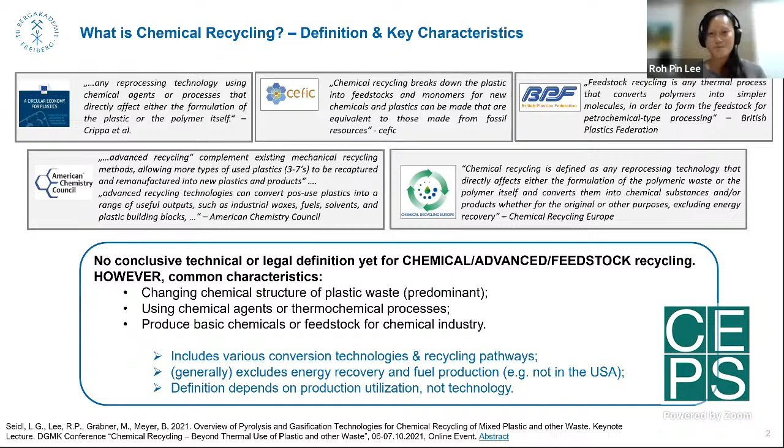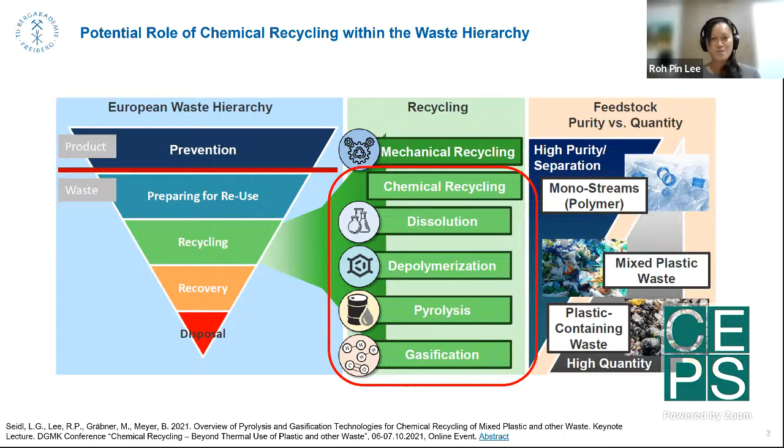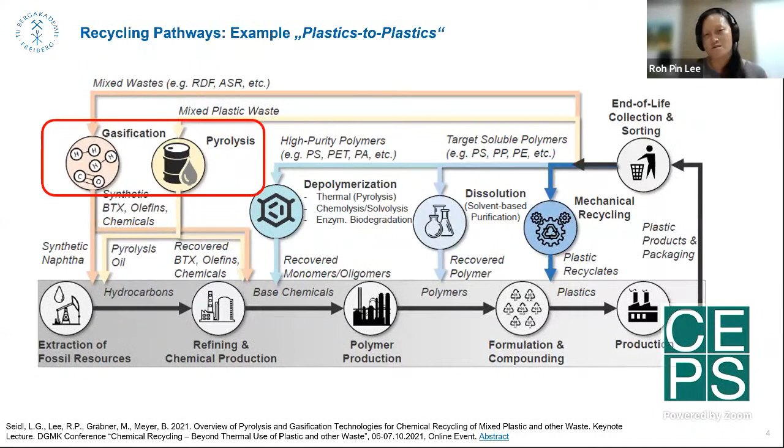So this is just an example based on plastic to plastic. What happens in the linear economy is following extraction, we go through refining and chemical production, producing the polymers, and then going on finally to the plastics. What happens after utilization is it could go through a whole range of different recycling routes where they are recirculated back into the chemical production chain at different areas. Today, for the rest of the slides, I really want to focus on pyrolysis and gasification for the rest of our discussion.

What are the technological advantages and challenges when we talk about pyrolysis and gasification? For one, looking at pyrolysis, what we have noticed based on market development is that it's suitable for a range of plastic waste. What is really charming about pyrolysis is the possibility for the products to be integrated into existing petrochemical sites, for example as a naphtha substitute for production. Also the scale of production is not that big - very often modular kind of production - and this allows it to be very attractive for decentralized production.

And the pyrolysis oil, which is produced in smaller quantity, can be channeled altogether to a centralized position or location, such as at a chemical production site for centralized utilization. So that's the charm of pyrolysis.

But on the downside, based on our screening of pyrolysis technology providers on the market, a lot of the technologies are suitable mainly only for mixed polyolefins, meaning PP and PE. And very often the oil quality is challenging. Pyrolysis oil contains a wide range of different components, and it is quite challenging to get this to match the specification of a cracker, a naphtha cracker for example, which is like this very sensitive machine.

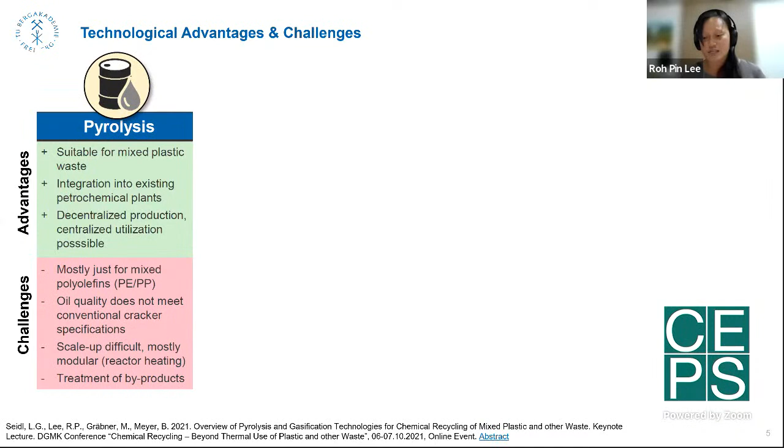So very often, in order to make sure that the oil quality could fit specifications of a cracker, you have to make sure that the waste going in is relatively pure. So that's one restriction for pyrolysis for a lot of the technologies out in the market. Scaling up tends to be also very challenging, and treatment of byproducts is also an issue which is not very often addressed openly. Some examples of pyrolysis projects out in the world today.

Agilyx have a plant in the USA focusing on polystyrene waste to monomers, and they're operating at 10 tons per day. Plastic Energy have 2 plants in Spain, for example, operating at 15 tons per day.

We have the CTC technology from Carboliq in Germany, and they are kind of unique because they are looking at municipal solid waste, so a mixed range of feedstock which is not just plastic, operating at 12 tons per day to pyrolysis oil. And what's interesting is Brightmark Energy in USA, which has currently a plant undergoing construction and going into commissioning. That's on the larger scale, going at 300 tons per day.

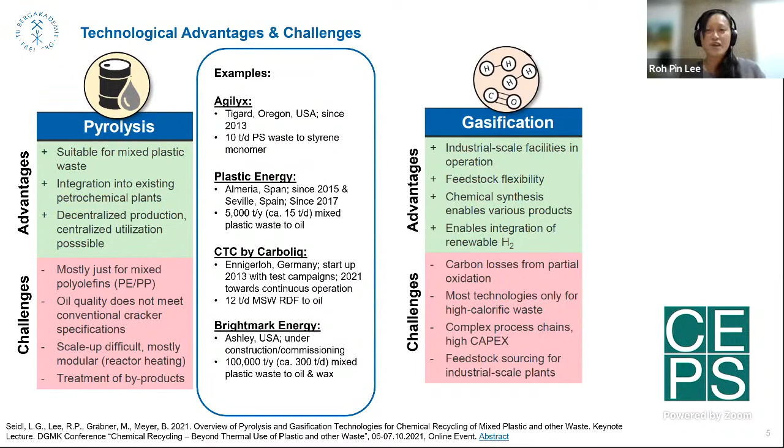So as a contrast, let's look at gasification. Compared to pyrolysis, gasification is on a much larger scale, and it also has a wider feedstock flexibility because it operates at a much higher temperature and generally at pressure, which allows it to break down the feedstocks into synthesis gas components, into molecules.

And the advantage of gasification is that the synthesis gas, which is a mixture of CO and H2, can be channeled on for chemical synthesis, a wide range of synthesis possibilities. We are talking methanol synthesis, ammonia synthesis, etc. And through all these routes, you can come up to a wide range of products.

And this whole process enables the integration of renewable hydrogen. So ultimately, in the future, where we have so much renewable electricity on the market that we do not know what to do with it, we can integrate it into the gasification process to go for really CO2 neutral chemical production. So that's the charm. But challenges are definitely there.

For one thing, operating at such high temperature and generally high pressure conditions, you're going to face carbon losses along the processes. And the technologies being deployed on the market right now very often target higher calorific waste of about, let's say, 20 megajoules and above. So if we look at municipal solid waste, which is generally about 12 to 14 megajoules, this is the question: what needs to be done to prepare the feedstock to make sure it can accept this kind of lower calorific waste?

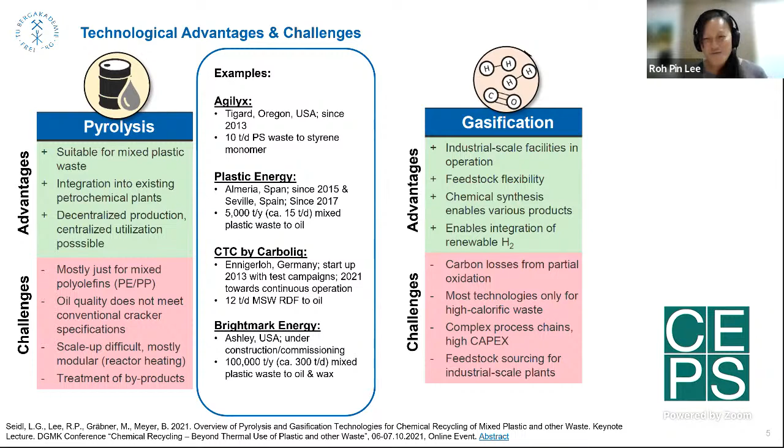Gasification has a complex process chain, and on the larger scale it is more complex than pyrolysis, which translates into a higher capital investment cost. And the question is, if you have a larger scale plant, where is all the feedstock supposed to come from? Even the pyrolysis providers on the market are noticing now that feedstock is really the bottleneck right now. Some examples of pyrolysis and gasification projects out in the world right now.

Next example is Enerkem, also very interesting. It has a biofuel plant in Canada, in Edmonton, in operation since 2014 for methanol production, and in recent years they have switched to ethanol because it makes more of a business case. Enerkem has announced a couple of projects in the Netherlands, Spain, Canada, China, etc.

Thermochem Recovery - I'm sure a lot of you have heard about this big project they are pushing, the Sierra biofuel plant in USA. Construction is supposed to be completed this year already, so they must be going into commissioning, and they are targeting municipal solid waste for FT Syncrude, so Fischer-Tropsch products.

And last but not least, we have InEnTec. Another interesting technology is plasma gasification combined with fixed bed. According to them, they are looking at a smaller scale because this actually came more from the hazardous waste gasification side.

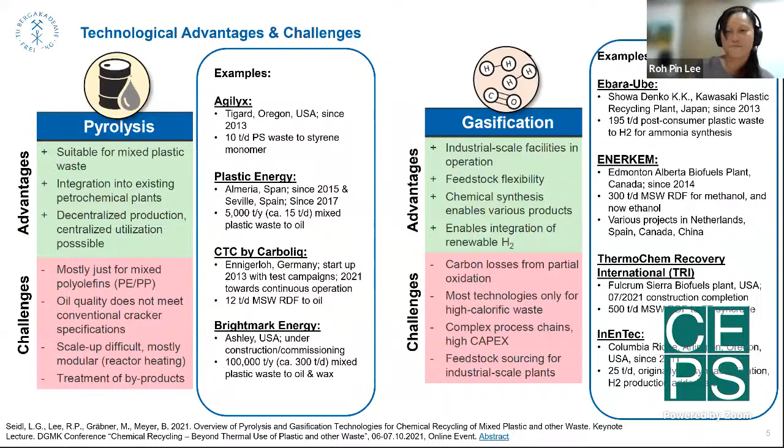So the global state of play for pyrolysis and gasification today. If we look at pyrolysis, generally what we are observing is that the technologies have lower feedstock flexibility, but there's a large number of technology providers on the market, more than 46 and still counting. The average reactor size is about 12 tons, and scale-up targets have been announced, looking at probably around 54 tons per day. The focus for commercial deployment that we are observing right now is about 20 to 100,000 tons per year capacity.

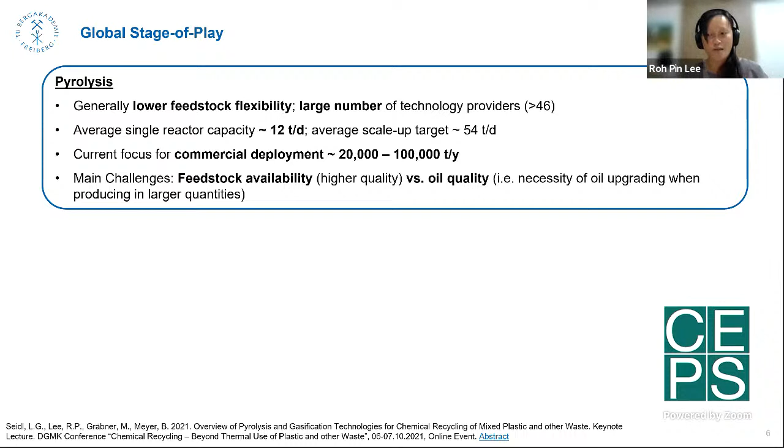There are challenges that, as I already mentioned in the previous slide, really relate to quality of the feedstock versus oil quality. So attention is moving now also more towards upgrading of pyrolysis oil so that larger quantities can eventually be fed into the naphtha feedstock.

Gasification, in contrast to pyrolysis, offers greater feedstock flexibility, but there are fewer technologies on the market compared to pyrolysis. Average reactor size is 5 times more than the pyrolysis reactor, and of course the scale-up is looking at a much larger scale. There are also a couple of projects in planning or undergoing commissioning, and a lot of work ongoing in gasification targeting increased feedstock flexibility and also to increase efficiency and scale.

If you look at gasification, it is not something new. Gasification has been around for a long time for coal gasification. That development actually arose from Germany in the 1930s and 40s already. And on the other hand, for hazardous waste gasification. Coal gasification focused on homogeneous feedstock. So the challenge is, how do I shift this industrial technology focusing on homogeneous feedstock to something very heterogeneous?

That's that challenge. In terms of hazardous waste gasification, it's on a smaller scale. Then the question is, how do I upscale that? Feedstock availability is a challenge for gasification technology because we are looking at plants which are 100, 300 to 500,000 tons per year. So you need a very stable, secure, available feedstock supply to ensure that the gasification plant is operating stably. The question is also business case. With such a high capex, how can gasification meet a business case against pyrolysis, for example, and also against waste incineration?

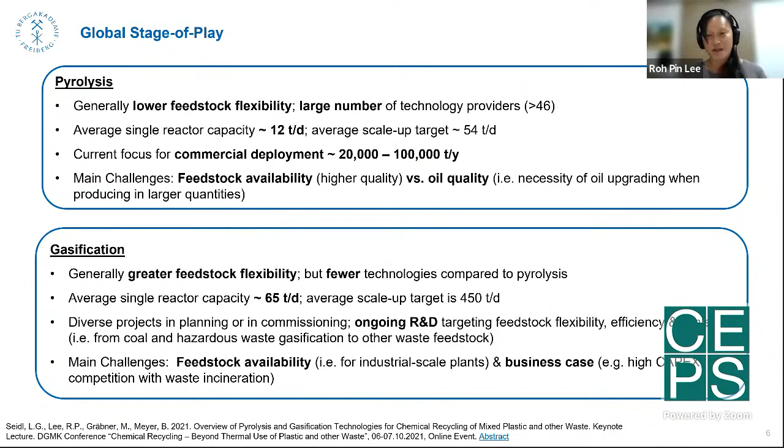So coming finally to my last slide on some of the trends and developments which we are observing. Chemical recycling's role is to complement, not to compete with, mechanical recycling. The focus we are seeing is that the market, and also policymakers, are moving away from pure plastic streams to mixed and challenging wastes. That includes also carbon fiber, glass fiber materials, composites, sewage sludge, automotive shredders, etc.

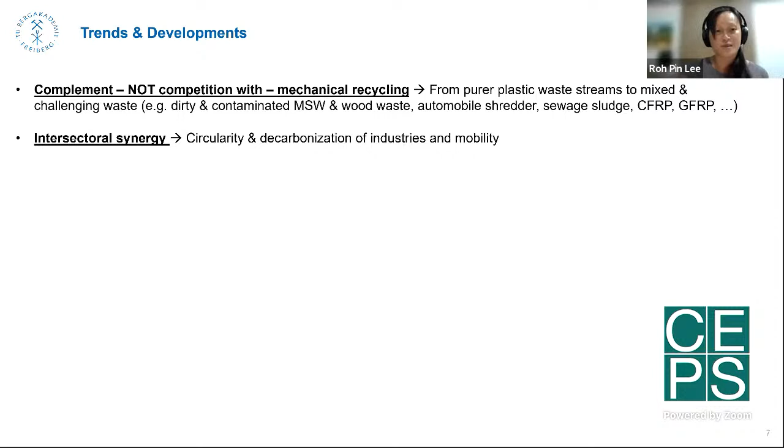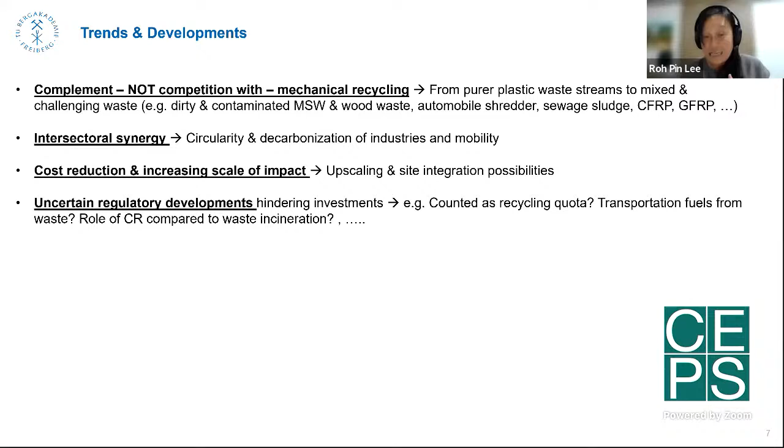There's also a lot of interest nowadays in how there could be intersectoral synergy, not only focusing on circularity, which has been what chemical recycling has generally been about, but also how it could eventually contribute to decarbonizing industry and mobility. Cost reduction, increasing the scale of impact through upscaling and site integration possibilities is of course a huge market interest. But there are very uncertain regulatory developments going on, which are hindering investments in this direction. It is unclear what is counted as recycling quota, whether transportation fuel from waste is counted as recycling, and where the role of chemical recycling is compared to waste incineration.

Just to share some examples of how regulations could have a supporting impact: US carbon capture credits have really incentivized activities in this direction. Netherlands, with the introduction of a new carbon tax for industry, including waste incineration, has really also been a huge driver for new projects in this direction. And government subsidies, having a guaranteed gate fee for the waste for chemical recycling and a price premium for CR products, has really supported the continual production of the Japan plant.

And lastly, we are hearing a lot of discussion about CR technologies, but it seems that there is a lack of transparent information, or even any information, on the technologies to allow policymakers and decision makers to really evaluate what its role could be in the waste hierarchy. So we are aware that the EU JRC is looking at an LCA study for CR technologies. Our institute is also currently working on a project funded by the European Climate Foundation to develop recommendations for guidelines for LCA and TEA, techno-economic evaluation, specifically for CR technologies.

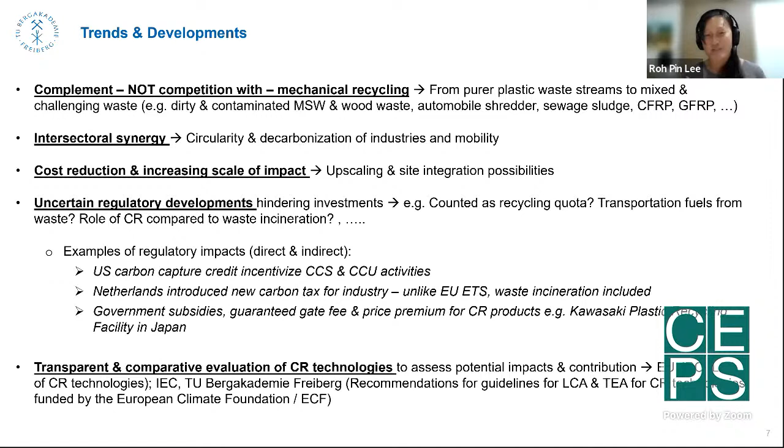So all these developments are happening right now in this very dynamic and very exciting field. I'm looking forward to hearing from the other speakers today and also to the discussion with you guys later on. Thank you.

Thank you, Roh Pin. It was a bit ahead of time, but it was so interesting. Sorry, I didn't want to interrupt. I think you set the scene very well.

Now there are a number of questions in the chat box, some of them of technical nature. Maybe you can see which ones you can answer while the other speakers are presenting. I have a lot of questions myself, so I'll keep most of them for the discussion later.

Just a quick follow-up question. I found your second slide very interesting, presenting this landscape of different definitions and interpretations. For me, this immediately brings a link with the circular economy concept in general, which is often used as an umbrella concept to describe a lot of different things. Now for some people that brings a variety of other issues - different interpretations at the member state level, at the policy level, at the company level. Or confusion, if I can put it in simpler terms.

So I was wondering whether you see a similar risk for chemical recycling, and what do you think is the way forward. Should we continue keeping this umbrella kind of terminology for all of these different processes, or do you think there could be a different way forward that could provide a different level of clarity? Whatever thoughts you might have on this.

Yeah, I think the definition - from what I'm aware, also from the discussion with Yannick - on the definition of recycling, generally looking from the policymaker perspective, they want to try to have a definition which is more encompassing, also to allow for developments in that particular area.

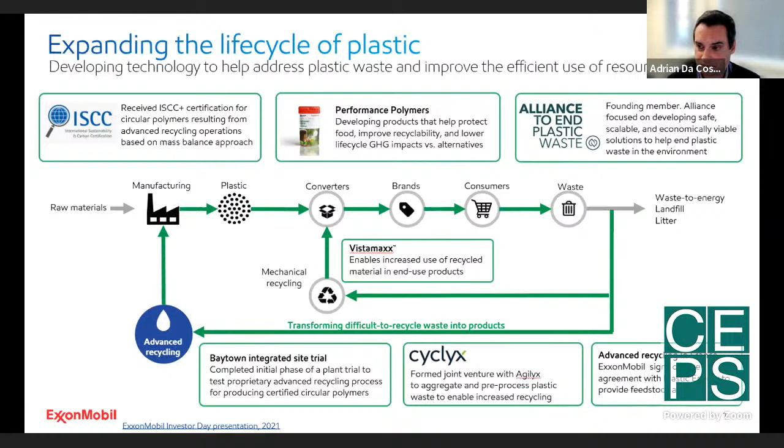Okay, good. So maybe we can move to the next speaker, and then we'll go back to some of these points. We'll move to Mattia Komoto from Aquafil. Mattia, thank you for your time today. I understand Aquafil is implementing a different type of technology featuring this chemical recycling discussion. What are your views regarding the prospects of these technologies, and any challenges and opportunities you want to highlight?

Thank you very much for the introduction. I'll try to share my screen—can you see it? Okay. First of all, I'm here today on behalf of Giulio Bonazzi, Aquafil's CEO, who unfortunately had an unexpected issue and cannot join us, so I'm going to replace him. Going to the topic of this event, unlike what was presented so far, Aquafil has taken a different approach to circular economy and to chemical recycling technology.

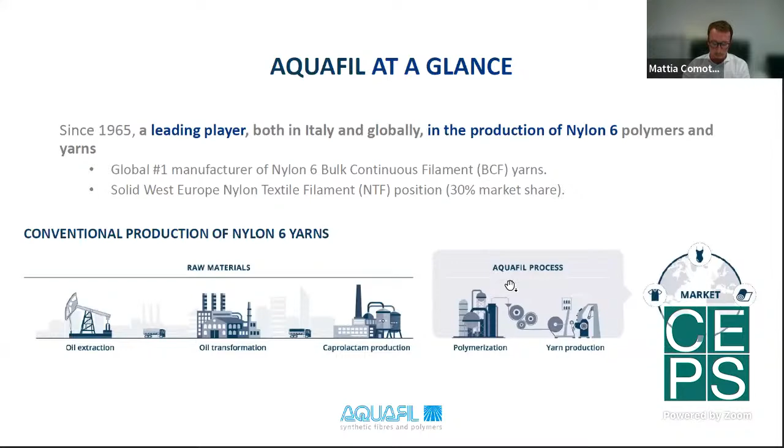First of all, Aquafil is a multinational company that operates mainly, but not only, in the nylon 6 business. Though the company was founded as a conventional nylon 6 producer using fossil-based raw materials, approximately 15 years ago we started investing in renovating our business model with the ambition of decoupling our production processes from fossil-based feedstock. In 2011, we launched what is called the ECONYL regeneration system, a technology operating at commercial scale which enables us to chemically recycle a wide range of pre- and post-consumer nylon 6 waste.

When I say chemical recycling, I'm referring to a depolymerization process, where the nylon 6 polymer is returned to its monomer, named caprolactam. The monomer is then purified and repolymerized back to ECONYL regenerated nylon, a nylon 6 that presents the same quality, property, and performance as nylon from crude oil. All of this is obtained through a fully traceable process where segregation of material is kept—so no allocation, no mass balance approach is used in the case of ECONYL regenerated nylon.

Beyond technological aspects, I think sustainability is and shall be the key driver in developing chemical recycling technology. Though the plastic industry can potentially bring many recycled products to market, if their environmental footprint is higher than their fossil-based counterparts, we will always face an issue in terms of sustainability of products. This is why we decided to assess our footprint and get the environmental product declaration of our ECONYL nylon, a certification verified and certified by an independent third party.

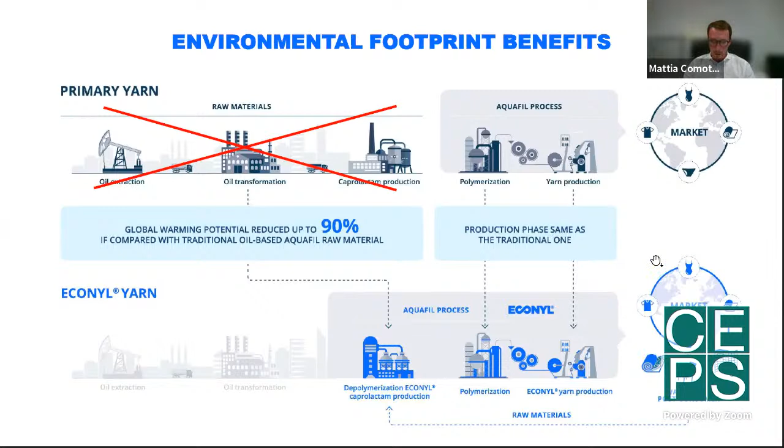Unfortunately, I have to say that we see almost every day creative shortcuts that allow companies to claim as sustainable and circular those products that in reality are made from crude oil. These initiatives, from our standpoint, should be clearly regulated to avoid any misuse of them, since they could damage the credibility and commitment of that share of the recycling industry which, in the last 20 years, has invested in real processes and technologies to deliver real recycled products.

This is basically all from my side, and thank you again for the opportunity of speaking today. Of course, I'm available for any question.

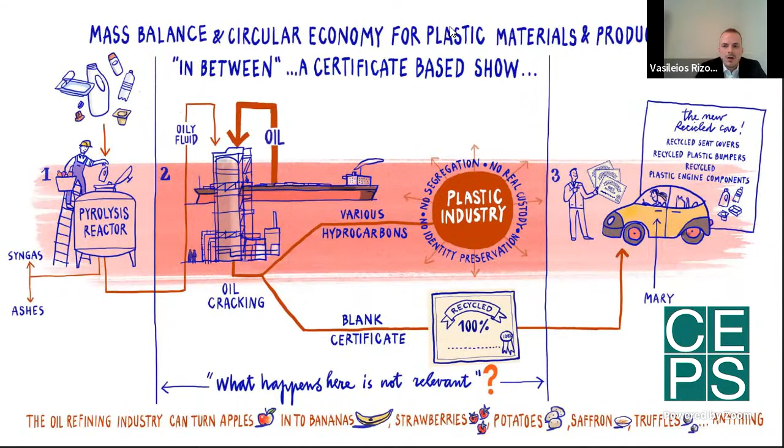Thank you, Mattia, for presenting details about your process. We take good note of your criticism over other chemical recycling processes and the mass balance approach, which we will discuss after all the presentations. But perhaps it would be useful for the audience if you could give a little more information regarding the waste streams you currently manage, and that you think you will be able to manage in the coming years, perhaps with technological innovations. One of the starting messages of this event is that there is a very wide range of different waste streams, and some existing technologies can only be applied to certain ones. So for us to have a good mapping, maybe you can give an overview of where you stand now, or where you think you could start in the future, and we'll come back later to the discussion on mass balance and other issues.

Well, definitely the nature of the waste that can be processed by our technology is probably the most challenging part. Today, we recycle both pre- and post-consumer waste. Among the pre-consumer, we are talking about textile scraps, plastic scraps, and byproducts or waste from nylon 6 production. In the case of post-consumer waste, we are mainly talking about old carpets and aquaculture and fishing nets. We collect this waste from all over the world and bring it to our facilities in Slovenia, where our ECONYL regeneration system is located. Of course, we are still investing in developing new technologies that could perhaps one day enable us to recycle streams of waste that currently cannot be fed into our system.

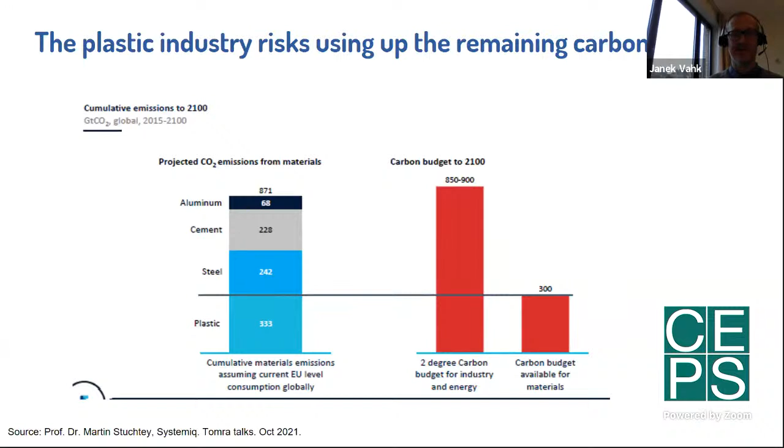I think what is particularly important is to look at what is happening now. The end of life treatment is a clear example of what is wrong when it comes to plastics. We can see currently that a lot of plastic is incinerated and very little is recycled. We are seeing a total divergence of emissions from end of life treatment of plastics.

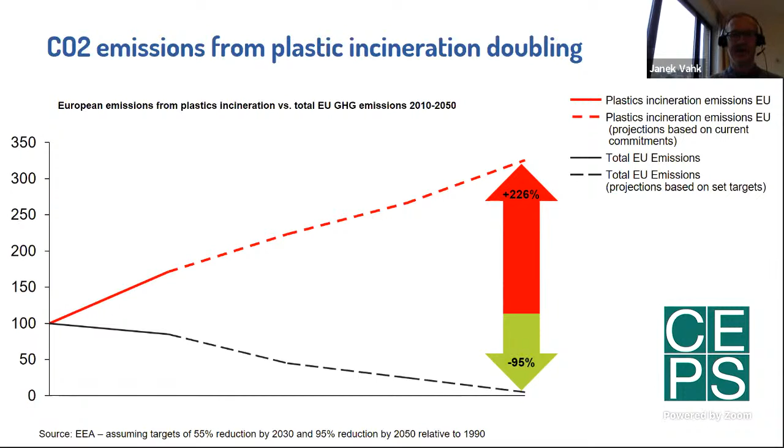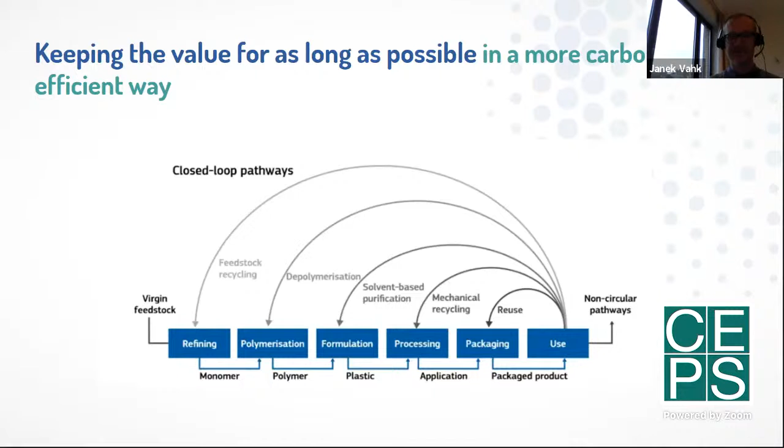So that has to be considered when we look at what is happening now in terms of global developments on recycling, particularly chemical recycling. Robin mentioned we have a lot of developments around pyrolysis, and the question is whether that's the most efficient way for the future, taking into account also the need to really cut down on our carbon emissions.

So the question immediately raised is: can we actually afford moving in that direction? Since even with business as usual we need to cut down on our emissions if we want to keep to the 1.5 degree scenario. And it seems like the technologies at the very left end of the image I showed you tend to be very, very energy intensive, and therefore release quite a lot of greenhouse gases.

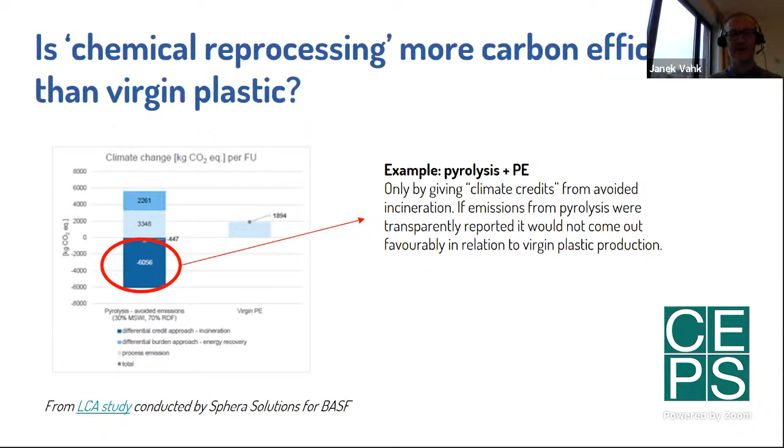So what we are proposing, by taking into account the related carbon emissions, but also the recovery rates of the actual materials that come out of these processes, we recommend to have some prioritization. Putting the most environmentally friendly options at the very top, such as mechanical and dissolution recycling, then as a second would come polymer to monomer recycling, so-called depolymerization options, and then define polymer to molecular technologies as recovery.

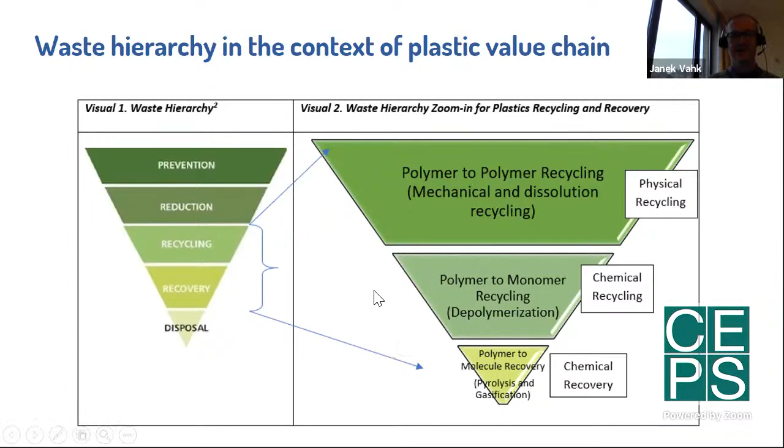I also think it's important because we talk a lot about different feedstocks, sort of like treatment options, and the fact that some of the technologies can deal with mixed plastics, but the reality is that we know they have a lot of challenges. Robin just mentioned a couple of them. Therefore, it's also important that we focus very much on upstream innovation rather than try to come up with high carbon solutions.

Particularly hard to recycle plastics, single-use plastics, should be phased out in the first place. So it's also important in this discussion to focus on really improving the actual recyclability of plastics, which is the main issue. It's not so much about coming up with technology that can solve that, maybe at the molecular level. We should focus on upstream and then start phasing out hard to recycle plastic as soon as possible.

I know that at least here in Europe, the European Commission is working on that. And chemical recovery, which is very energy intensive, should always come as the last resort.

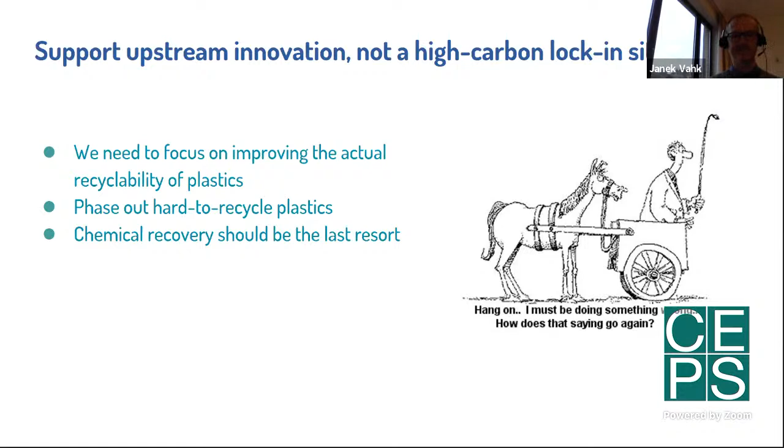I just wanted to mention a couple of things in terms of what is missing in terms of regulating chemical recycling, chemical recovery, both at the EU but also on the global level. I think there is still missing the definitions - what they are, and which ones of them are chemical recycling, which ones should be recovery.

More importantly, I think there is a lot of confusion when we talk to our colleagues in the US, but also in other parts of the world, around the fact that in some cases fuel production is considered as recycling. I think this should be sorted out and should clearly exclude any fuel production.

It's also important to have very ambitious standards for determining the actual recycled content in order to avoid greenwashing, because we see now products coming out claiming to have 100% recycling. And we know that if you would really follow up on them, you would maybe find no recycled content at all, or only 2% or 5% would come from recycled content.

And this is all because of some of the private standardization and verification systems that allow free allocation and even trading of recycled content claims. It's also important, and I think Robin mentioned, to have a methodology for comparing the different life cycle assessments, because at the moment it's extremely flexible, and honestly LCAs are not really comparable. So it's very important that we have some kind of reference in that.

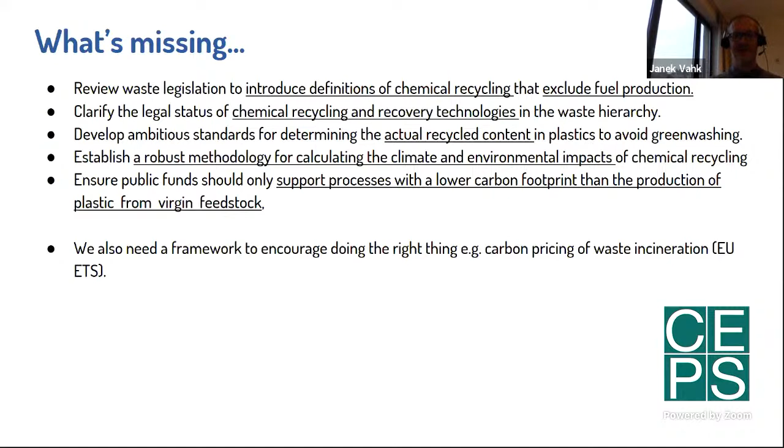So yeah, I'll stop here, and I would be very happy to have a discussion with the panelists and participants. So thank you.